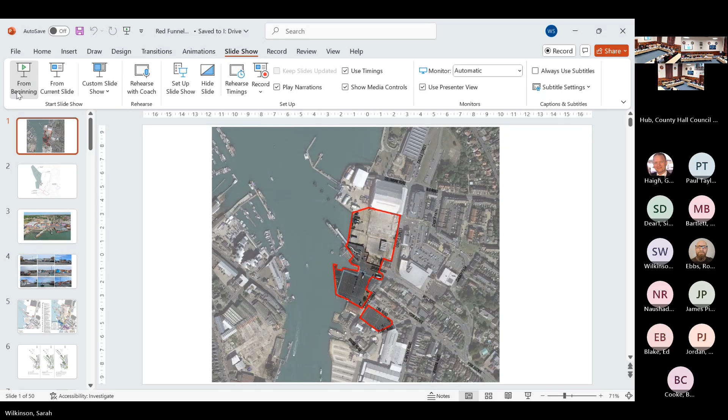As outlined in the report, the application relates to the land in and around the Red Funnel Ferry Terminal in East Cowes. We all know that well, and we were on site on Friday, but I have got a couple of images that show that in terms of a Google aerial, showing the site identified in the red line, which handily shows the existing marshalling yards in a slightly darker grey compared to the proposed marshalling yard, which is in a slightly lighter grey. But we will go into that in more detail.

That just shows the landward elements of the scheme, whereas this plan shows the red line for the application boundary, which also incorporates some off-shore elements, as we previously discussed.

I'll jump back to the previous slide and identify for locational purposes the Columbine building to the north here - that is the site boundary at its greatest extent in that direction. And then at this point, the closest listed building to the site is the Clare Ludlow gridiron building, which we looked at when we were on site.

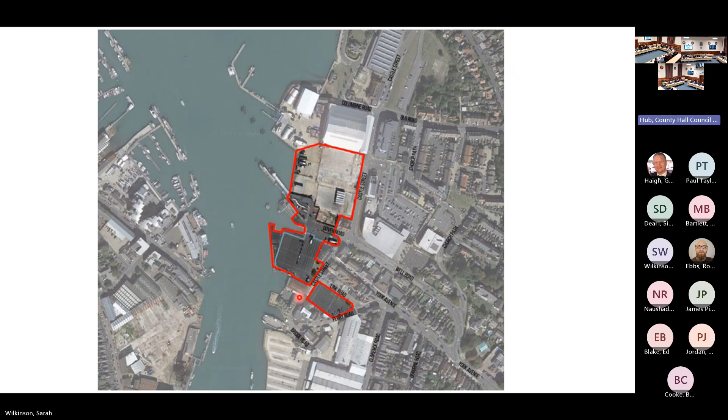Moving through the slides, you then have the application boundary outlined in red. The areas in a dappled or hatched red are the outline elements, with all other elements being full. This part shows other land within the control and ownership of Red Funnel, which does not form part of the application site. You also have an area greyed out offshore, and the red line flows into that area - that's part of the site covered by a marine licence, subject to separate processes through the Marine Management Organisation, sitting alongside the planning process.

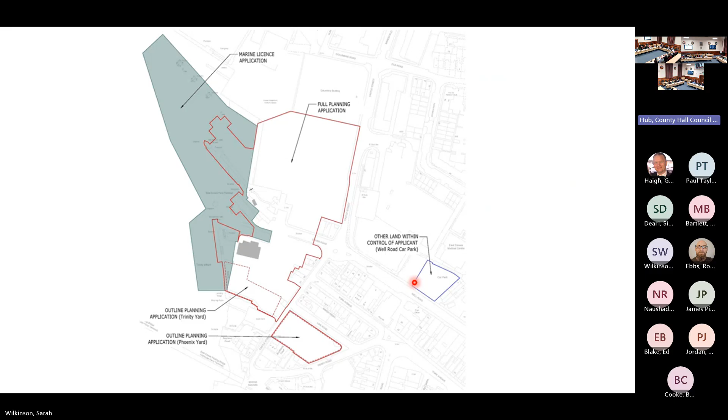I thought this plan was really helpful for members to locate themselves in relation to the references within the report, because it clearly identifies what areas we're looking at. Firstly, we have the Columbine building, as discussed already, which is a good marker for locational purposes.

You then have what's referred to in the report as the redux yard, the proposed marshalling yard area. In blue outline is the Trinity yard, or part of the Trinity yard, and in purple the Phoenix yard. For locational purposes, to the front of Phoenix yard and the side of Trinity yard, you have the Clare Ludlow gridiron building.

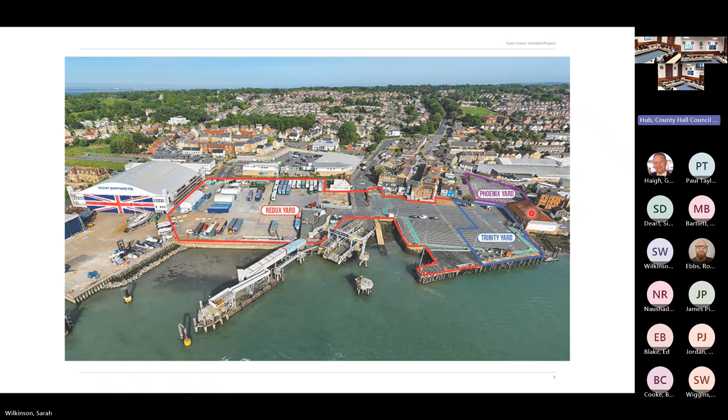Just some general photos in and around the site. Councillors, we were there on Friday, so I won't stay on these for any length of time - you are aware of this location.

Moving through the application, there is quite a lot incorporated within it, so I'm hoping the slides will help us go through these in turn. But I thought it was helpful to stop on this for a moment.

The slide on this side shows the existing situation. You have the redux yard, which we visited on Friday, with a lot of movement of HGV commercial vehicles coming backwards and forwards currently, and the drop trailer area. Then you have the Trinity yard and Phoenix yard - Trinity currently used primarily for marshalling of vehicles, with Phoenix almost a holding area before you cross the road, which we saw on Friday. Then the existing link span and berth with the existing terminal in this part of the site, which we also looked at on Friday.

The proposal sees that moved around a little bit. Section 3.2 of the report sets out a detailed list of what is incorporated within the full element of the application. I'll touch on some of those elements in relation to how they appear on the slide at the point of the cursor.

You have coloured elements within this plan showing mixed use development and hotel development - those are the two elements of the application that are outline only. The rest of the development is full, and that is what I will run through now.

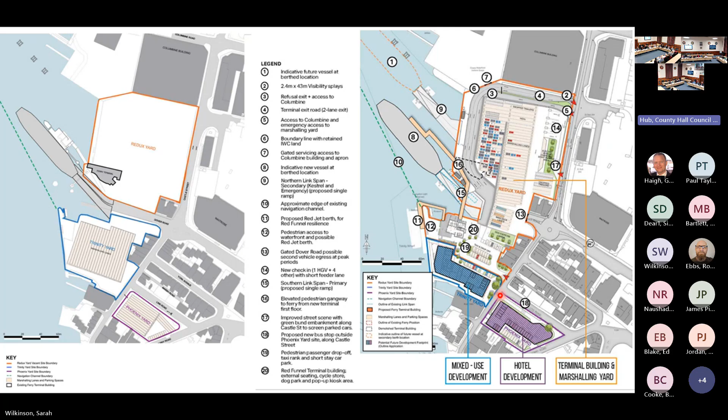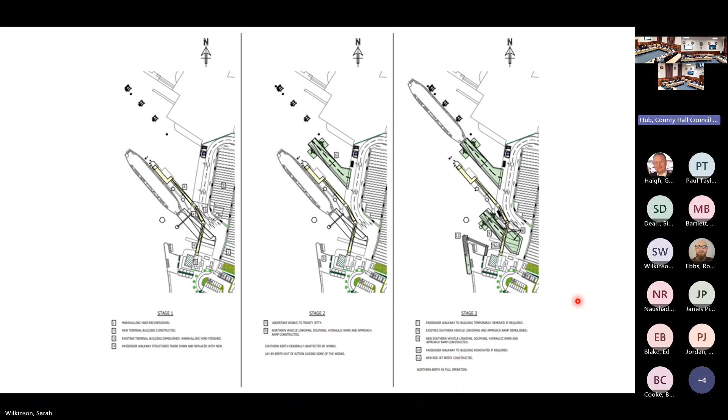Due to that, most of the works on the berths would be undertaken in the winter months to start with, so it does not affect the timetable too significantly when the service isn't as busy.

I will now move through as quickly as possible, so apologies, as this is quite a long presentation, covering some of the elements of the full aspects of the application.

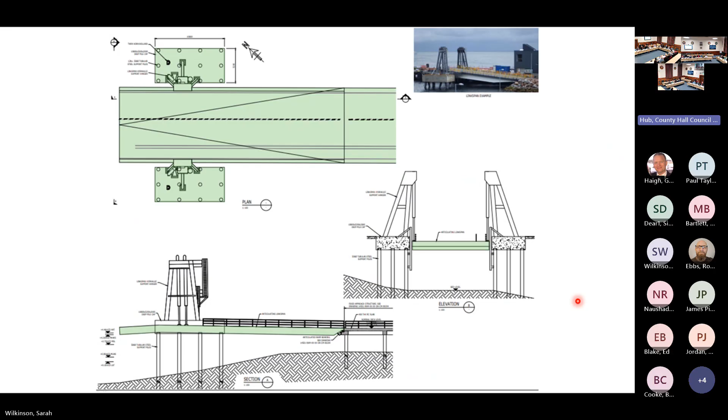This plan shows the support structure details for the link span as you come across, with a visual of that. It shows the fixed link span approach for the northern link span, and then the same for the southern link span.

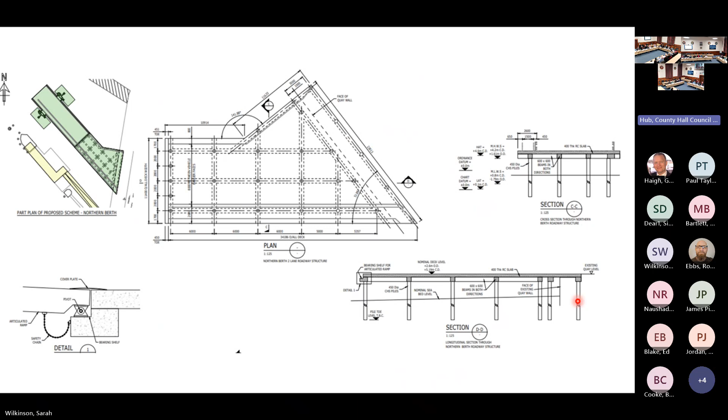You will see this dashed line through the centre here, running diagonally across this part of the site. That is the position of the existing slipway, which is why it would have to be removed as part of the scheme. You will see in your heads of terms that a contribution has been agreed to mitigate the loss of that slipway.

You'll also see from this slide, which we'll get to in more detail, a yellow element that crosses the southern slipway - that is the elevated pedestrian walkway bridge, which we will cover in more detail as we move through these slides.

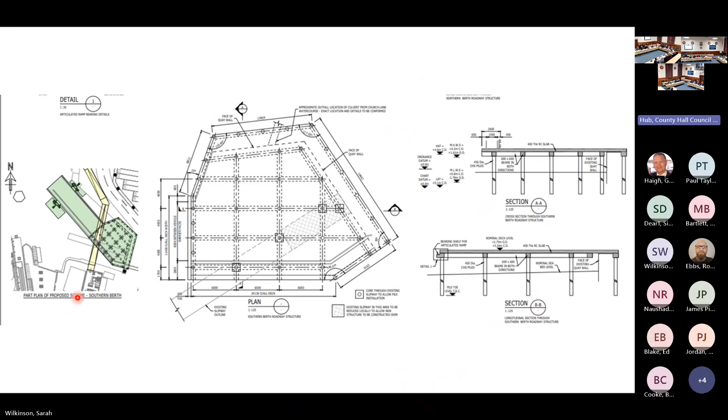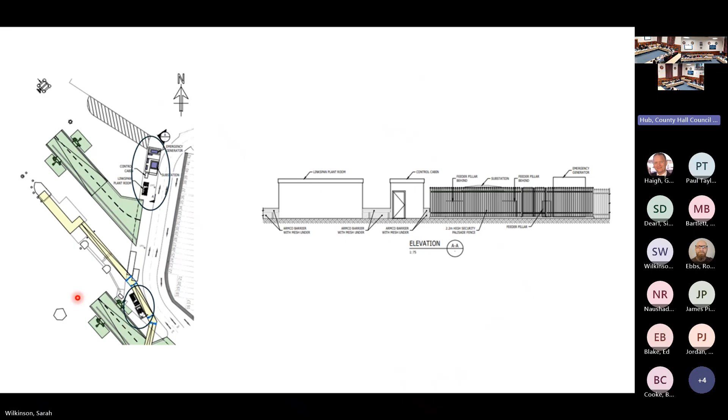I mentioned briefly when going through the list of elements of the site the incorporation of various buildings for the functionality of the link span. The link spans are articulated to allow them to work at all states of tide, and therefore where you see those circles alongside the proposed two link spans, there would be a control room, a plant room, and at the northern one, a generator and substation. That's just showing the visuals of those buildings - they would be very functional and fit for purpose, and very small scale.

The application, as I've previously stated, would include a dock area for the red jet for use in emergencies. You will see within condition 27 of the report for the full element, there is a condition that restricts use of that to emergencies only. So it would not be a permanent relocation of the red jet, it would simply be for a case of emergency.

I think we discussed on site the fact that, I believe it was last year, there was an issue with the bridge or the docking at West Cowes, and the red jet couldn't actually dock. So this ensures that there is some consistency of service in that event.

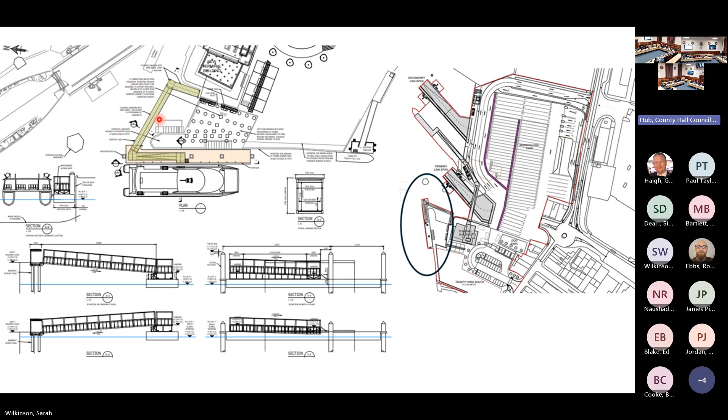You will see that as part of this, there would be a covered walkway, similar to that seen at West Cowes, travelling from that decking area. We talked about the replacement deck for an area of public amenity and seating, that's at the point of the dot now, and then the link span onto the proposed red jet jetty would, in essence, come from the back of the terminal building at this point here and access around that docked area.

In terms of the proposed marshalling yard, this would be located on the existing redux yard, as we previously discussed. These two images are identical, just blown up a bit more, so hopefully you're able to see it in slightly more detail.

The proposed marshalling yard would allow for approximately 339 car equivalent units. The existing Trinity marshalling yard only allows for 200, so there would be quite an increase in the number of vehicles accommodated. The current ferry has an average capacity of 180 vehicles, so the existing marshalling yard is generally about the size of an existing ferry, whereas the proposed marshalling yard would allow a significantly greater amount of vehicles, which would allow for those who arrive early and wait to go on.

As discussed on site in some detail, the application would include 5 check-in booths as opposed to the existing 1, and 4 lanes of those check-in booths would be for cars, and 1 lane would be specifically for HGVs, that being at the end. Those check-in booths would lead to approximately 42 rows in order to allow access for vehicles.

As discussed during the site visit, what you would also have as part of this is a stacking lane running off the ferry all the way around the edge of the site at the point of the cursor, and then running down the side before merging and exiting onto a new exit on Castle Street, directly opposite Waitrose. The entrance would come in almost from a slipway at this point, where you would have 2 lanes, which would then access to those 5 booths.

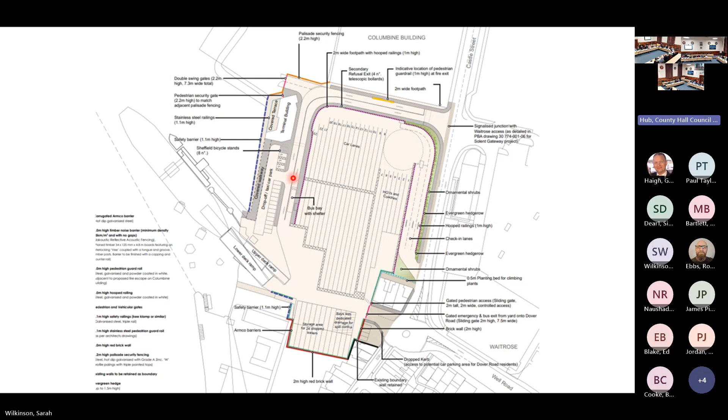This could be built tomorrow. What this didn't include as part of this scheme, due to the position of the drop-off area, was that long access stretch that we talked about, which would accommodate half a boatload of cars on site. That wasn't incorporated as part of that development. But I thought it was important - we have referenced it in the report, and the history is relevant. So I wanted to show members what that historical consent looked like in terms of layout.

Moving through, I said that I had a plan that just shows vehicle movements in and around the town, and I think this is quite an important plan to understand the way in which vehicles would move through the town. This is discussed in the committee report.

Ultimately what you have at the moment is obviously vehicles travel through the town along the same route as you get to the floating bridge, and then they enter the site that way through what is shown here as the hotel building. But in essence, the purple line that you see running through here then combines with the floating bridge traffic to run through that part of East Cowes.

What the application would do is take all traffic away from the town centre in essence, and that would come in at this point, travelling past Waitrose and then going up Castle Street. So it would keep, and as the purple lines show, which is the movement of traffic, the vehicle movements would be held on site far more than they are currently.

As a result, much of the vehicle movements would happen in this part of the town rather than in this part of the town. Ultimately, the application doesn't alter the ferry process. There will still be ferries coming in and going out, the same size ferries coming in and going out. We cannot avoid the fact that it will bring vehicles in kind of bursts into and out of East Cowes.

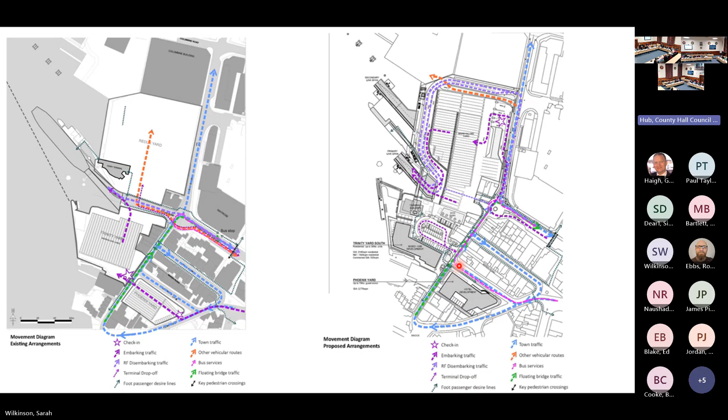That is the nature of a ferry terminal. The application can't alter that. It's part of the processes of a ferry terminal. What it can do is look at where those vehicles are pushed and how they manoeuvre within the site confines itself. So it won't change the number of vehicles coming in and out of the site, but the proposal seeks to take them out of the town centre and concentrate them as much as practically possible on site.

Other elements that we discussed on site include alterations to Dover Road roundabout itself, removing that build out that you see on Dover Road roundabout, that raised area, and making that a compliant mini roundabout rather than the current one, which isn't. That would facilitate more ease of movement for larger vehicles in and around that roundabout.

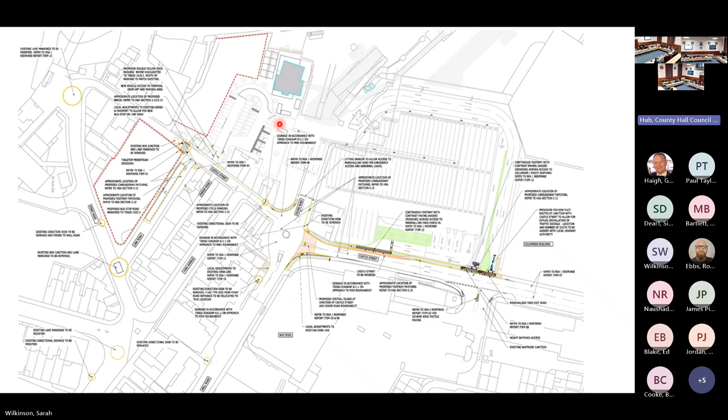These resulted from a road safety audit and a healthy streets survey, which identified elements that are needed. Some of those are as small as resurfacing of footways that are currently in a poor state of repair, and some involve widening of Castle Street at points along its route in order to improve that provision.

Moving on to the proposed terminal building and drop-off area. The proposed terminal building would be positioned on what I'm calling, for the purpose of the presentation, Trinity Yard North, as opposed to Trinity Yard South, which forms part of the outline application. So Trinity Yard would be split into two. The new terminal building would be positioned at the point of the cursor, which, as previously stated, is on the opposite side of the current link span to the current terminal building, which would mean that anyone arriving at the terminal building by foot wouldn't have to cross the link span to access it, as currently happens.

As well as providing an area for drop-off and parking, there would be 31 car parking spaces proposed within this area. It also includes a small area of green space where there currently is none, which is being called a dog park. In essence, it would provide a small area of recreation while you're waiting for the vehicle, for the ferry.

At this part of the site, you can just make out some dotted lines. These are what's referred to in the report as the pop-up stalls, which would allow for various kiosks to come at busy periods like the festival, where there may need to be greater provision for refreshments and whatnot.

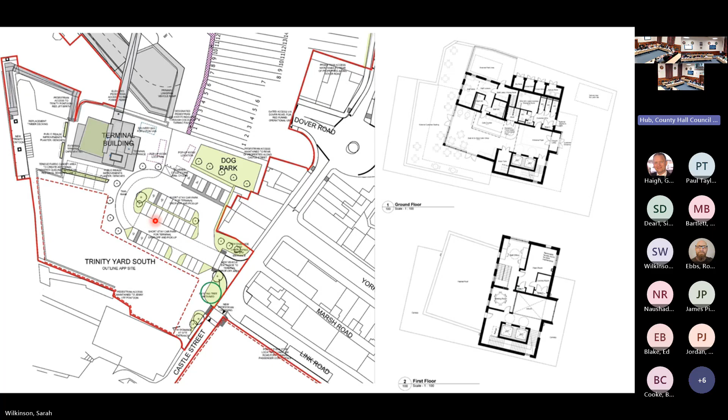We then move through to the remaining floor plans and then the proposed elevations for the terminal building. One of these is in colour, the rest are in black and white, but hopefully, councillors, the materials are set out within the committee report, and you will get an idea of the nature of the visual appearance of that building from other slides we have.

What you see as this red-edged element hovering at the side of the building is the raised pedestrian walkway that we've discussed. That would come out of the second story of the building in order to provide direct access onto the passenger deck of the ferry itself.

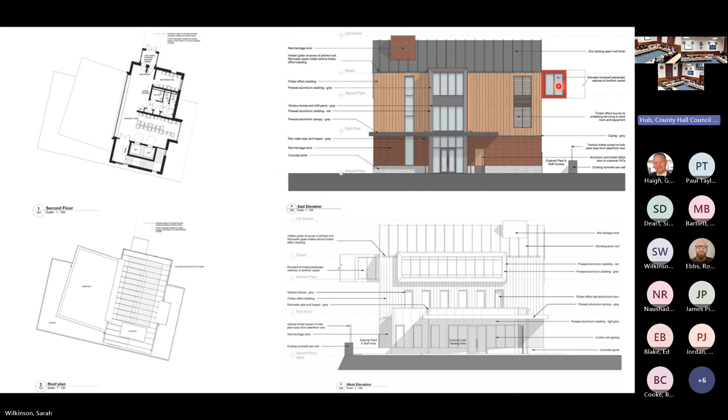As I move through the elevations, you can see the single-story cafe element of the building that's previously been discussed. That would have an overhang around it to allow for some external seating, and it would also have a living roof, which would add to the biodiversity on the site.

We've discussed the pedestrian walkway slightly. This would be an elevated walkway which would run, at the point of the cursor, over the southern link span. This part of it would be glazed, as can be seen in this image here.

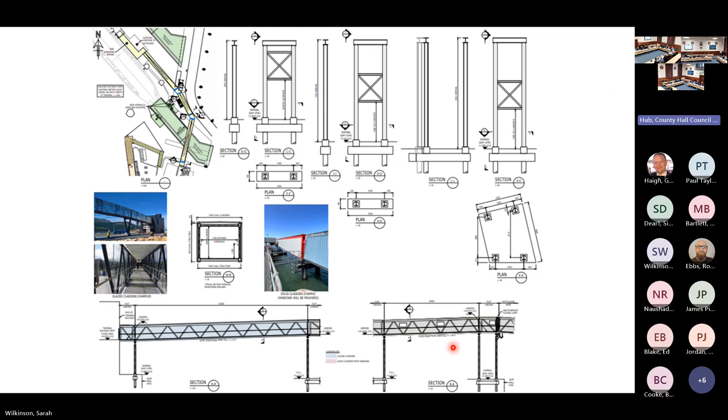The remainder of the link span would run down the side, between the two link spans, shown here in that yellow, which would provide direct access onto the pedestrian deck of the ferry. That would have more of a grey metallic finish, as shown here - councillors will be aware of the pedestrian access currently to the Red Jet. It's a similar structure, travelling down between the two link spans to access onto that upper level of the car ferry itself.

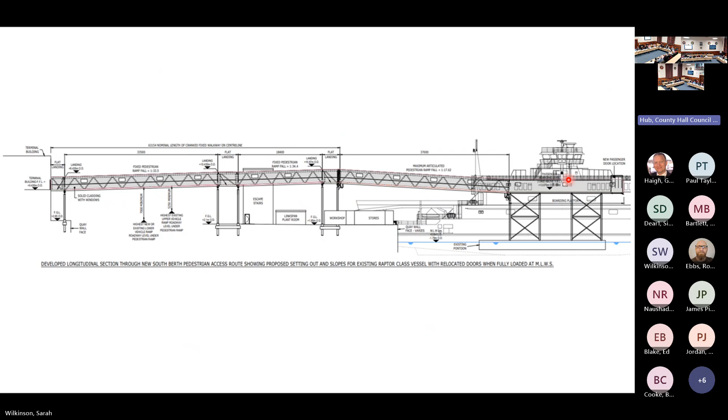I've incorporated some images to help visualise that part of the site. At the base of this image you can see the existing buildings and the existing terminal building, and then how that would appear in relation to the replacement terminal building, and the walkway that runs along the line of that dotted line there.

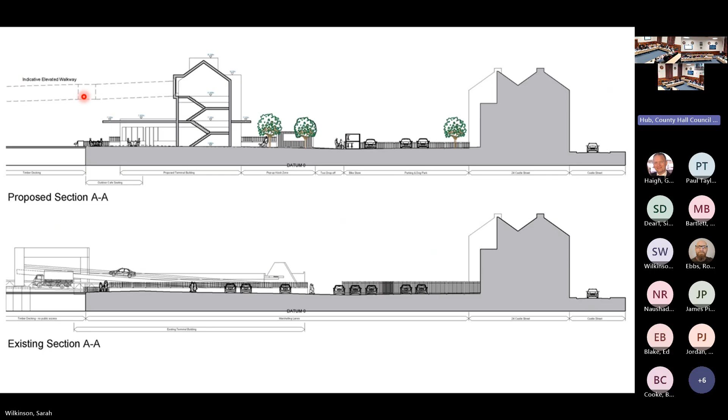And some further visuals, showing a street scene where you can see that terminal building in the background, with that walkway going across.

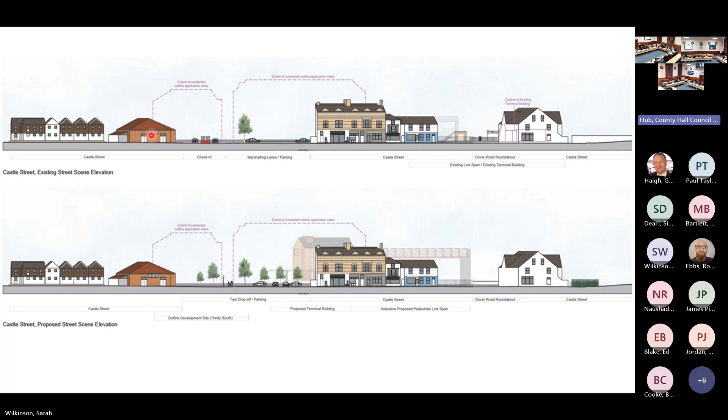On the Phoenix Yard site, which is the purple, that proposes an up to 80.

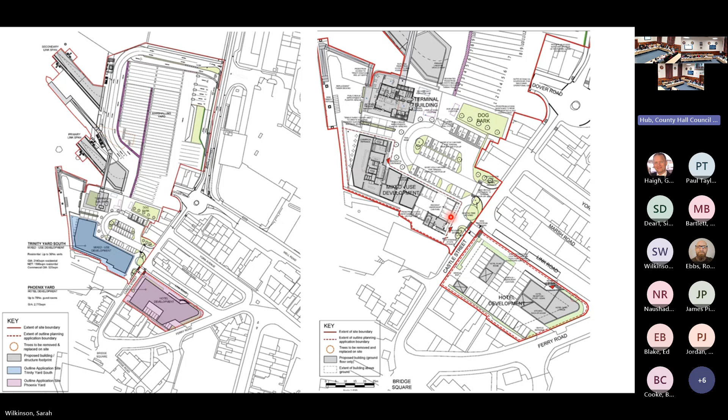Although this is outline, with no matters to be considered, some indicative and illustrative plans have been provided that show the floor layout and how that would sit within those two sites. You can see from the hotel development, much of the ground floor would be provided as car parking, which would be under the building, and elements of car parking under the building in the commercial element of the development as well. Moving through, in terms of the Trinity Yard South, the floors, how they would break up through.

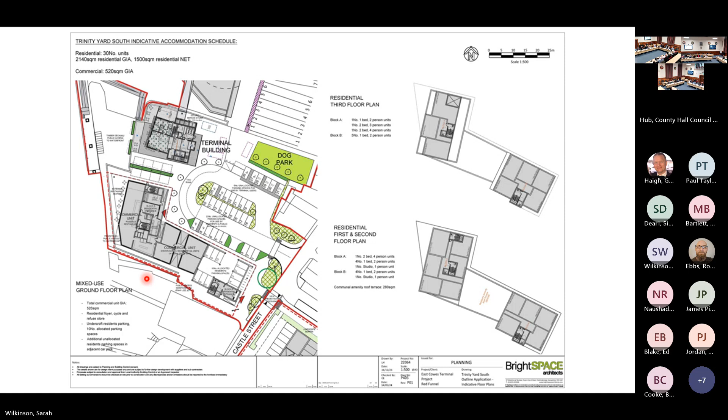The report references that there would be this reduced height element in the middle, which could be utilised. It's indicated as part of these plans as a roof terrace for the resultant residential properties, but that would be subject to detailed design, so we would ensure it wouldn't impact on the residential properties that sit within this area of the site. As we move through to the hotel building, that shows to be up to 80 bedrooms, with again a split in the middle to have some variation in height.

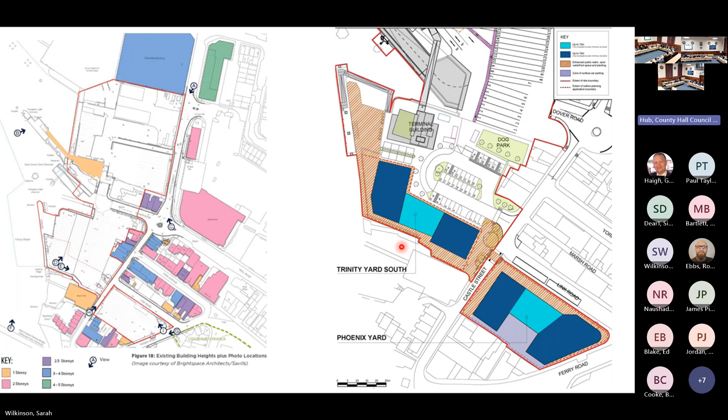In essence, the key heights to look out for: the blue on the plan are 3 to 4 storey buildings, whereas the green are 4 to 5 storey buildings on this part. The application site for the outline shows, in terms of its parameters, a maximum height of up to 15 metres, which is the dark blue, and up to 12 metres, which is more the turquoise in the central area. That's equivalent to a 4-storey building and a 3-storey building approximately. Then you've got a purple area, which would be the surface car parking.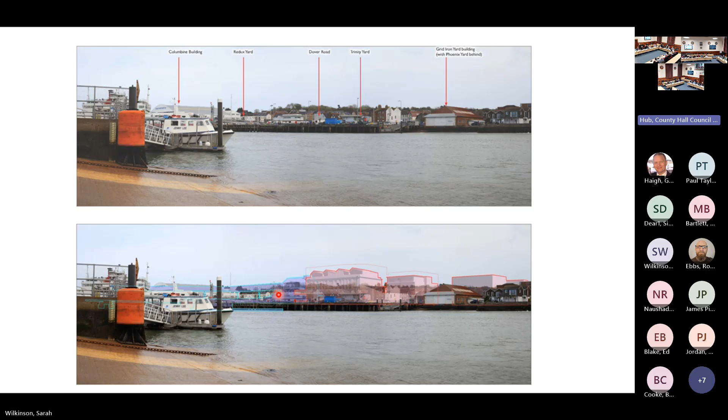The final image looks at a similar approach to wireframes, but shows it from the entrance to the floating bridge on the opposite side of the river, looking across from West Cowes, where you have the existing, and for locational purposes, we've got the Columbine building there. You can see in the bottom image, the red being the proposed outline and the parameters of that outline, and the blue being the proposed terminal building and link span. Although pure outline, they are seeking the parameters as set out within the plans, as shown within the slides in front of you, councillors. And then we'll end on the master plan.

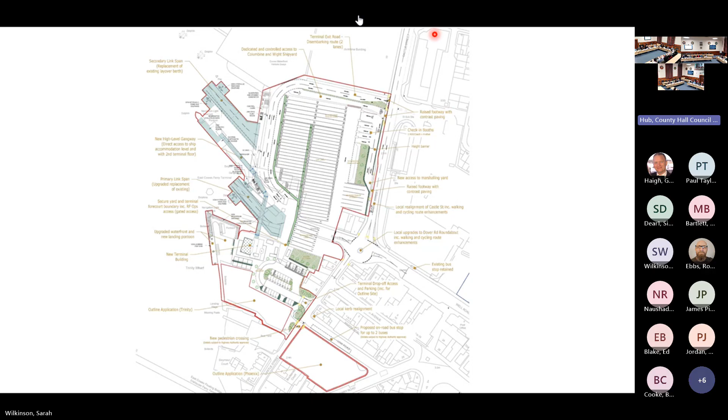The Town Council is very concerned that the proposed changes to the highway network will result in a non-compliant network on the western side of Castle Street, as buses will encroach onto the proposed junction. It might be a slight improvement on the current situation, but really the council should be looking for more than that. This is an application for high-level traffic use, and the council should be looking for full compliance.

The application includes a document written by Ramboll about the slipway, and the Town Council believes that some elements of this report cause them concern. At the start of the report, it says proposals for a replacement slipway to allow the launch and recovery of small craft are being explored. It also says the report is a high-level overview. When it says being explored and high level, it simply means early stages, which is markedly different from the previous application, which included plans and location for replacement.

Within this scheme, there is no provision at all for a replacement slipway. The applicant is offering a fixed sum of money, and the Ramboll report suggests that the Albany Road slipway could be upgraded. There are no costings with the report for the replacement slipway, as it is high level. As a consequence, it is really impossible to make any clear assessment, and the Town Council understandably fear that whilst the current slipway is far from perfect, the community will lose the slipway altogether, as the money that Red Funnel will provide simply won't be enough for replacement. The Town Council, via the residents' council tax through the precept, will be required to stump up the shortfall. As there are no costings, no one can properly assess whether the money being offered is reasonable.

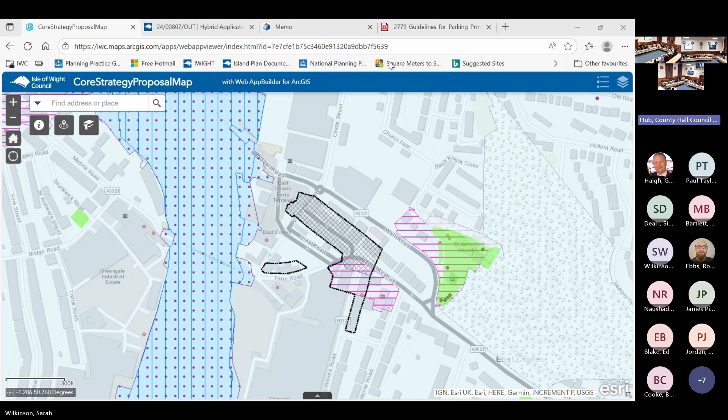Going back to Councillor Love's report, he suggested there was a need for £1 million of the Section 106 agreement for traffic calming etc. According to the plan, we've sorted the transport around the site, we've sorted the roundabout at the current entrance to the site. There's a little bit of paint required, but other than that, the ferries will be the same size. Vehicle numbers will probably be - I know the fund would like them to be higher, but they'll be what they are, and maybe they'll go back to what they were in the past. But it's unlikely any additional cars or lorries will result. And for a 106 agreement, it has to be mitigating something that's gone wrong, am I not right? So if that's the case, that's a total red herring.

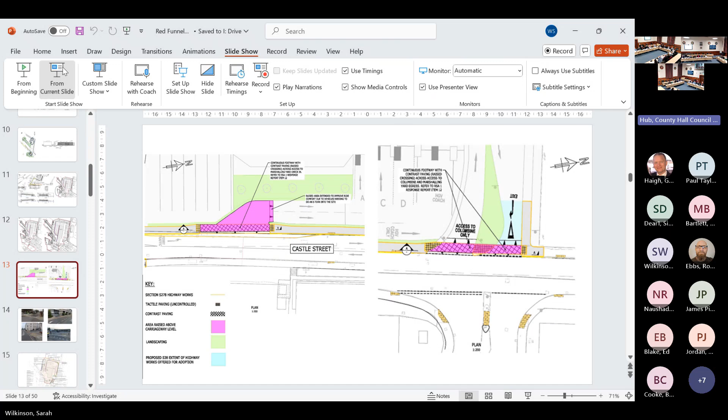If I pull the slides back up, which might help explain this - in essence it's one of those things in order to cover potential user error. On the slide you can see the existing entrance, the proposed entrance into the site, and then further along Castle Street - these aren't directly linked to each other - you have the exit from the site, but alongside that you have the entrance into the Columbine building.

So what the signage is intended to do is ensure that if someone travels too far up Castle Street, they don't try and enter the Red Funnel terminal through the Columbine exit. So those signs could be as simple as no entry, no unauthorised entry, no vehicles, access only for Columbine building, in order to ensure that people approaching this site who haven't been there before and miss the entrance don't overshoot and end up going up the Columbine exit.

However, if an error did occur, the layout within the marshalling yard, which would be controlled through the terminal operations plan that has been conditioned, incorporates what I don't think is called a reject lane but something similar, in that it's a lane that if somebody either doesn't get through the booths, they can get through the site and be turned around, not impacting on the free flow of traffic.

Thank you, Ms Wilkinson. Can I have a supplementary? Yeah, yes, of course, supplementary.

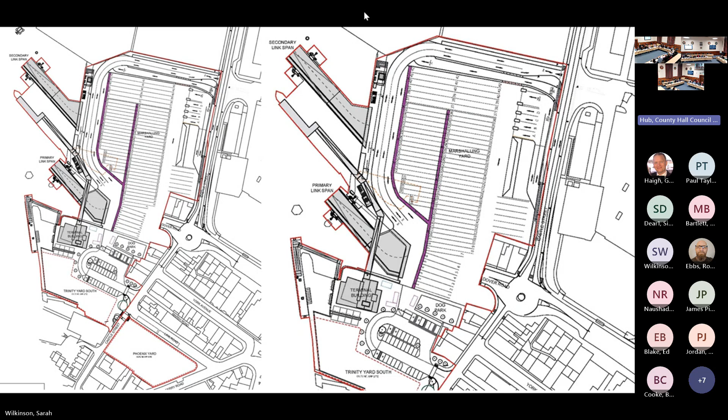So just so I'm absolutely clear in my mind, we're talking about incoming traffic to the marshalling yard. So let's just play through the scenario, however unlikely it might be: if a car misses the entrance and doesn't enter into the marshalling yard at all and carries straight on, how would they not conflict with the traffic exiting?

Thank you, Councillor Andre. Ms Wilkinson, I appreciate it's something of a supposition, isn't it? But ultimately, are there any concerns particularly around what might happen then? I think in answer to your question, Chairman, no, there aren't any concerns about that. I think probably because we can't plan and design for every eventuality that a driver may or may not do.

I was sat queuing for the floating bridge the other day and saw someone driving directly down the ramp, almost into the water, until someone ran after them and told them to reverse. I don't therefore suggest that the council in some way needs to alter the entrance into the floating bridge to make it clear you can't drive into the water. But just as a little anecdote, shall we say.

In the current situation, there is the potential for a vehicle to miss, especially considering the current marshalling yard is split. So if you are currently driving down Ferry Road to access Phoenix Yard, you could miss that. How someone could, with all the signage, I don't know - it's unlikely, but you could. And then you actually end up in the queue of traffic for the floating bridge, or you travel round Link Road and end up going in a circle around East Cowes and then come back to where you are. So the network sets it out, but the application does incorporate the need for signage, which would ensure that potential risk is minimised in the most practical degree possible.

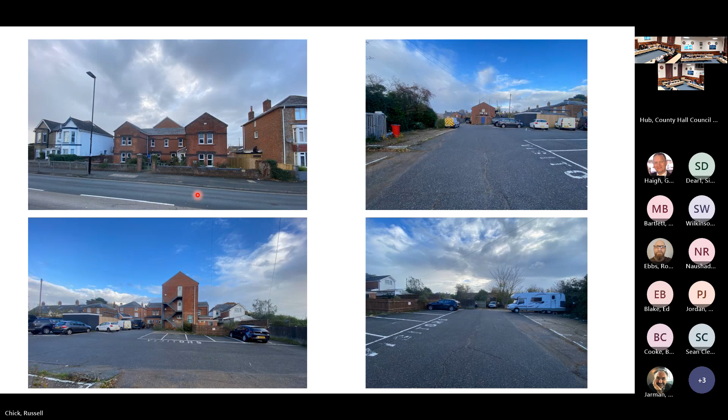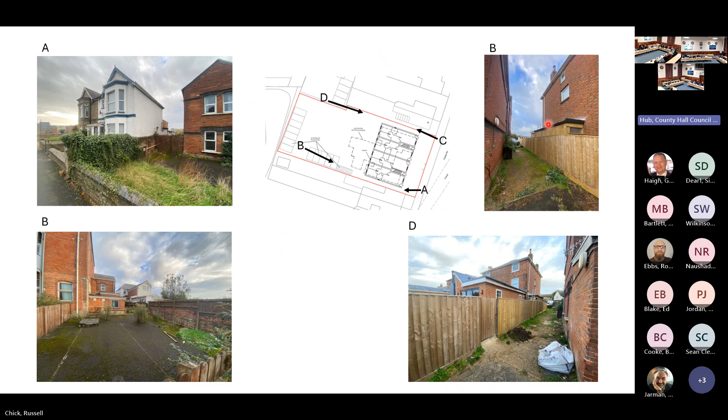Moving on, just to show some close-up photographs of the relationship between the council offices and those buildings. You can see a slight side elevation window to the rear of this property, number 15 Fairley Road, and below it where arrow B is taken from, again you can see the relationship to the rear. The council building there is quite a large building as it exists, and the photographs shown as B and D are showing the side elevation of the listed building.

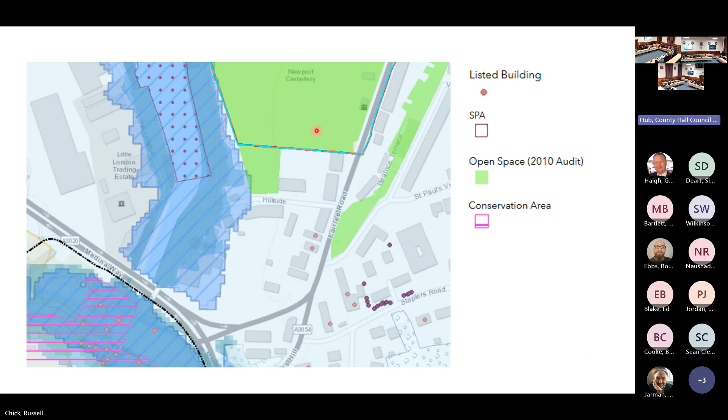So the proposal is purely outline. None of the detailed considerations are up for grabs through this application. It is purely trying to establish the principle of putting 10 2-bed apartments on this site. All of them would be affordable housing at discount market, so 80% of market value.

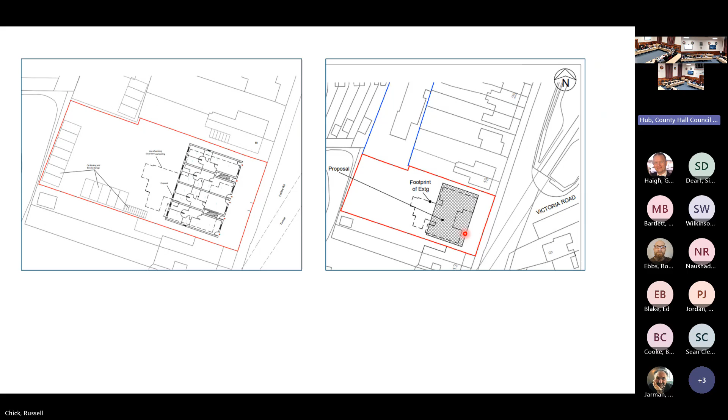The proposal is to fully demolish the existing building and replace it with a 3-storey building. You can see the footprint here. I thought the slide on the right-hand side is quite useful because it shows the footprint of the existing building and where the immediate front elevation extends onto Fairlee Road.

So what is proposed is to pretty much align with the setback of that existing building. Then just showing some elevations, just a health warning - this is purely indicative to show that a building of this scale could fit on the site. Those designs clearly would not be supported by the planning authority, but they are just an indication of the scale of a building that could be fitted on the site.

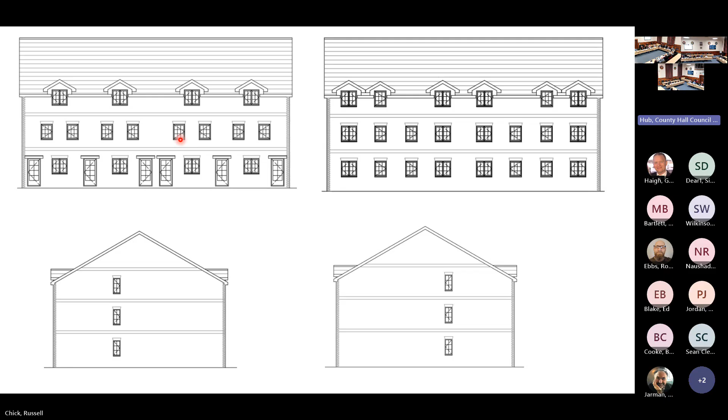So 2-storey with accommodation in the roof space to accommodate 10 apartment blocks. And this is just showing it in a street scene depiction, showing a transition between the 3-storey buildings to the north and the 2-storey dwellings to the south, with the building providing a transition between those levels in the street scene. So the application is proposed for outline permission, with all the other matters reserved should the application be approved.

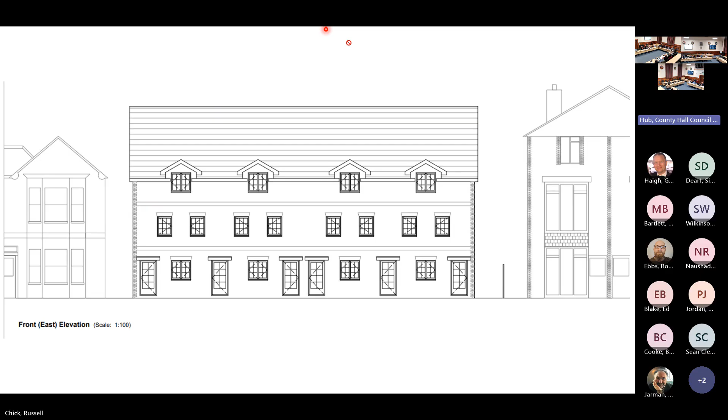Thank you, Chairman. Thank you very much, Mr. Chick. We turn then to our public speaking elements, so Councillor Price is the ward member. Councillor Price, thank you Chairman. Yeah, I haven't prepared anything to say particularly about this site.

It's clearly a site that is probably ripe for development in some ways. The building - it's a shame to lose that building. It's older than it looks. It was once our police station in Newport, and does, I feel, come with some architectural merits. But I realised that trying to repurpose that building - I've been in it many times over the years - repurpose that building into modern accommodation would be very, very difficult. I wasn't in there when it was a police station, by the way, so not that old for a start.

But obviously it's going to sadly lead to demolition of the existing building. Could I maybe ask that that building isn't demolished until it's sold, perhaps? Because otherwise we may end up with a demolition site right on the gateway to Newport, let's say. I don't know if that's something the committee can do, but maybe the council could consider that when they're marketing the site.